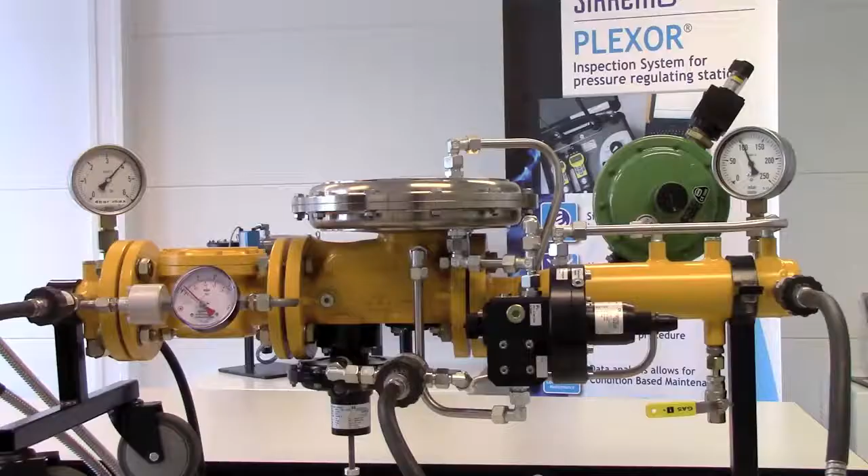Hello, my name is Jan Sietsma and I'm here together with my colleagues Reinier Marcus and Henk Pieters, and today we're going to show you a functional inspection of a gas control line with our PLEXOR inspection system for gas pressure regulator stations.

In order to demonstrate to you the PLEXOR system, we have a functional model of a gas control line where we use compressed air to create an inlet pressure of 4 bars with following components: a filter with a differential pressure gauge, a pressure regulator with integrated slam shut device, an outlet section with 100 millibars with a safety relief valve. Here we see the PLEXOR test device.

The system is IEC-Ex approved and can therefore be operated inside the gas control station. The main components are a digital manometer for the inlet pressure, one for the outlet pressure. Out here we have a Bluetooth device for wireless connection with a tablet, laptop or PDA. Here we see the function switch, which allows us to operate and test the various devices.

This is the test lever to give a standardized pressure rise or pressure fall of 1.5% per second. And here we have the system connections. First one is for the inlet pressure, the outlet pressure, the sensing line of the slam shut device, and finally the ventilation. The PLEXOR test device uses the inlet pressure to test the components of the gas control line. Various gas control line configurations can be functionally tested independent of the brand of the component.

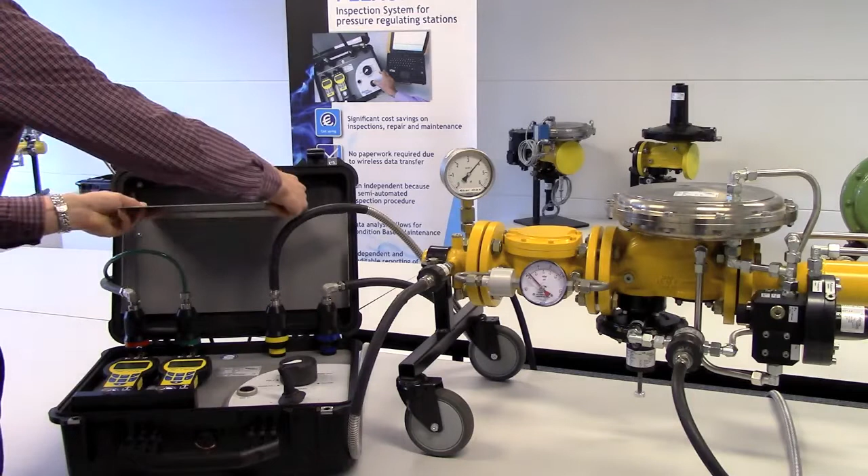Part of the PLEXOR inspection system is the connection software. This connection software consists of several modules. The manager module to manage the data of the pressure regulating stations, gas control lines and boundaries and inspection procedures. The inspector software to perform the visual and functional inspections, and the diagnostics module to analyze the results of the functional inspections.

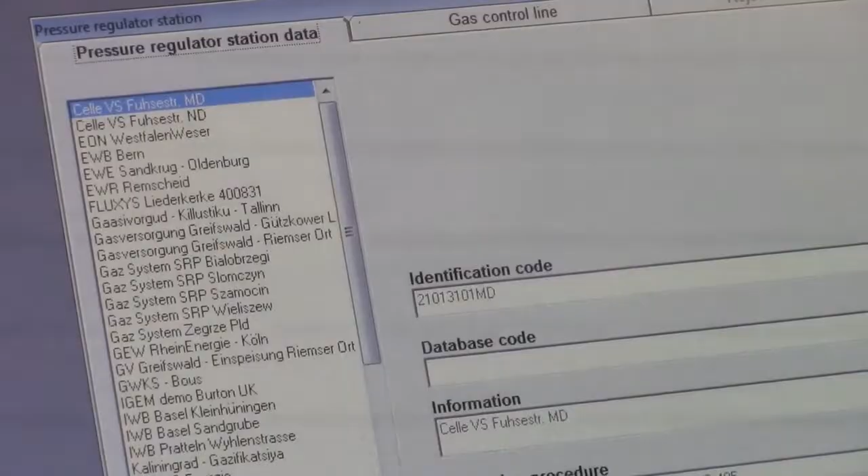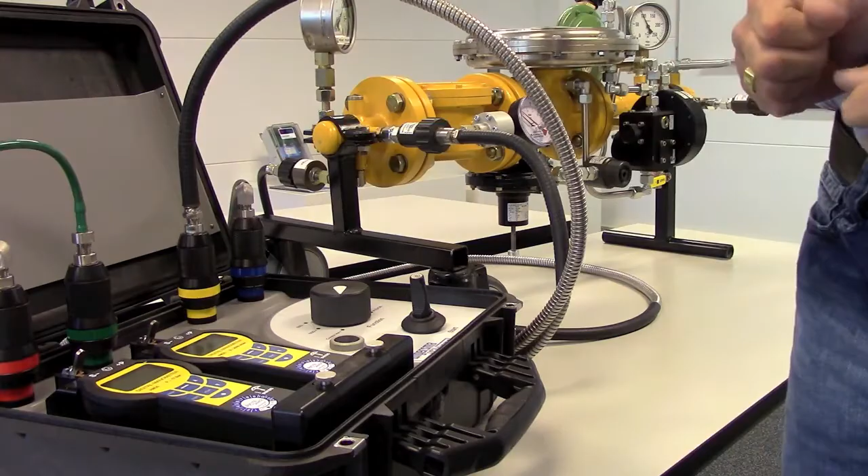The PLEXOR test device will be connected to the gas control line by means of color-coded, double-secured hose connectors. Against the clock, push, with the clock, and by the unique dimensions you cannot mix up this connection. Take away the protection cap and connect the hose to the system coupling.

All hoses are connected: inlet pressure, outlet pressure, slam shut device and ventilation to the gas control line. All couplings have their own unique dimension, so you are not able to mix up the connection from inlet to outlet. By using the Inspector PC software on the tablet, selecting the gas control line, make connection to the PLEXOR test device, the operator will be guided step by step through the functional procedure.

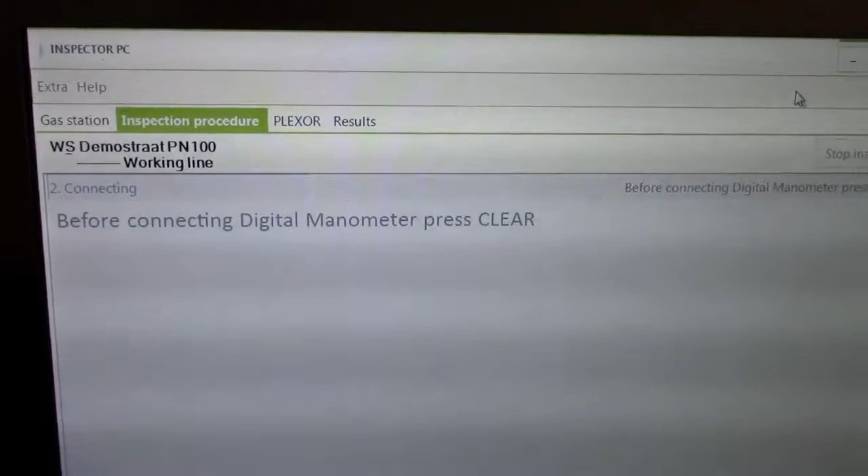Before connecting the digital manometers, we press clear 0 to adjust the manometers. Connect to inlet and test pressure and go for the next step. Put the switch into the position control line. And go for the next step.

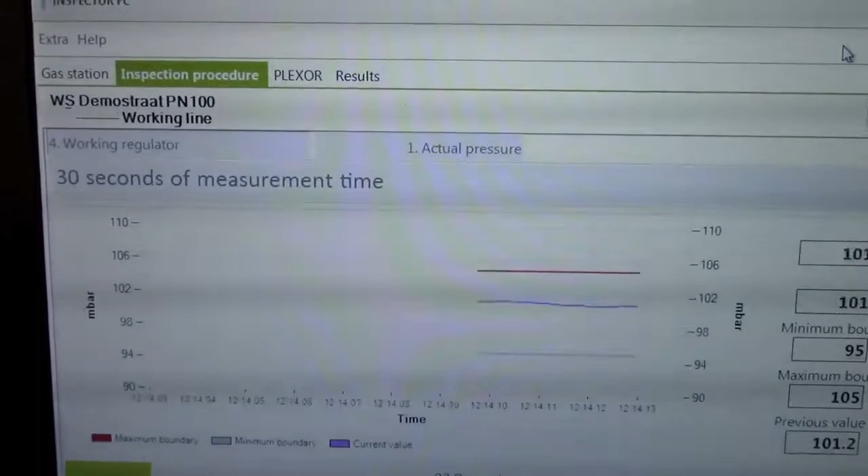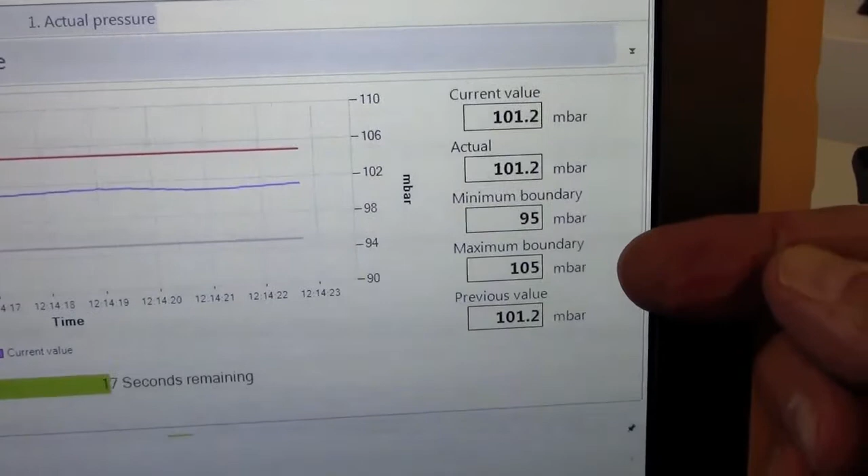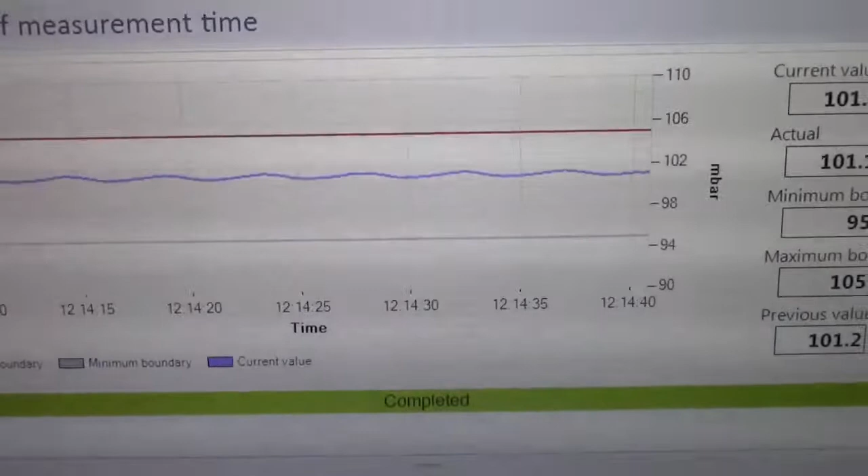Now, for 30 seconds, the outlet pressure will be measured, showing us the current value, the boundaries, accuracy range of the regulator, and the last previous value. That's the result of the last test. This measurement is 30 seconds and will log 10 measurements per second. After this beep, the display shows us the complete 30 seconds of this measurement. We are inside the boundaries, so we can continue with the next step.

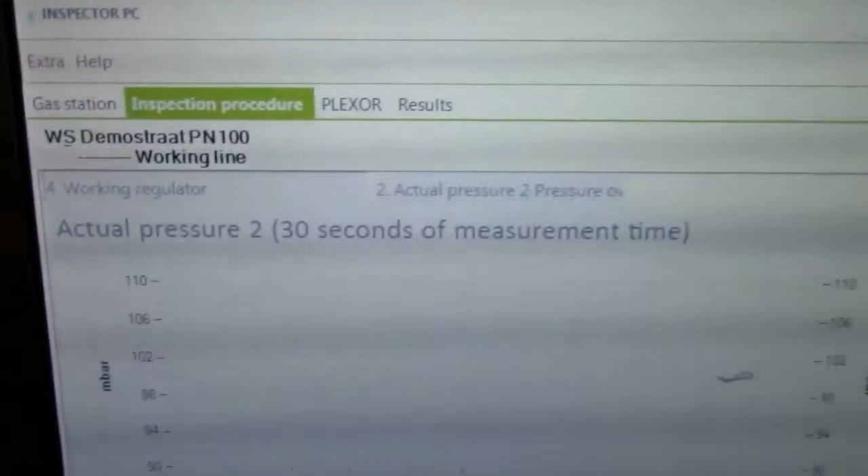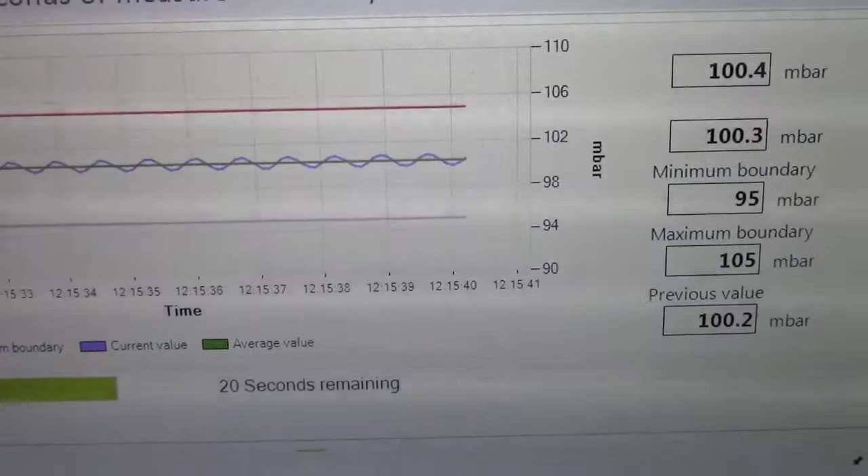We are now closing the outlet valve and go for the next step. We are now opening the ventilation valve in the gas control line to have a stable situation. Go for the next step. We are now measuring the actual pressure simulated over the ventilation valve to check the set point of the regulator. The value is 100 millibar, accuracy range 95, 105, and the last value was 100.2 millibar.

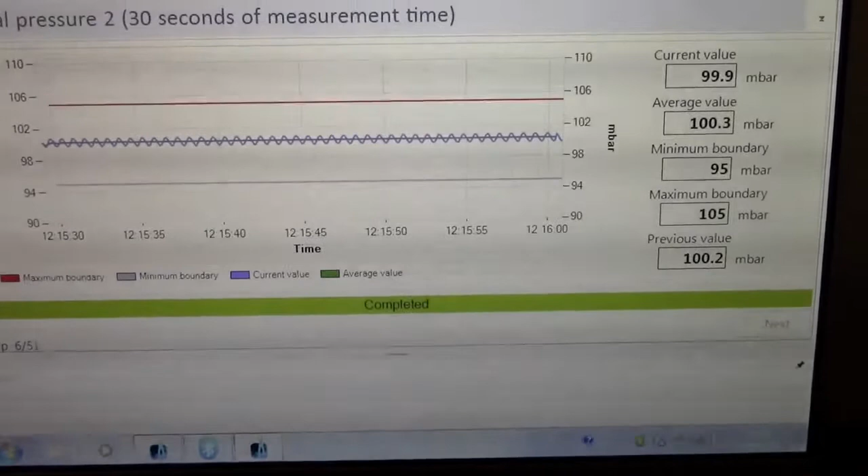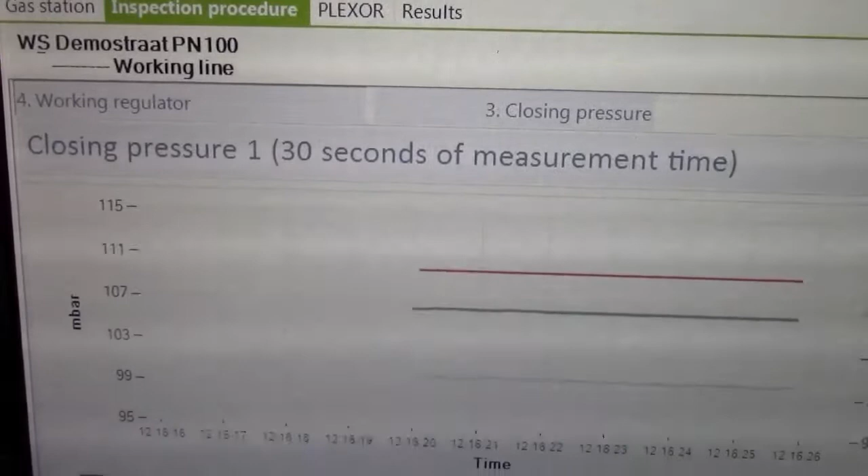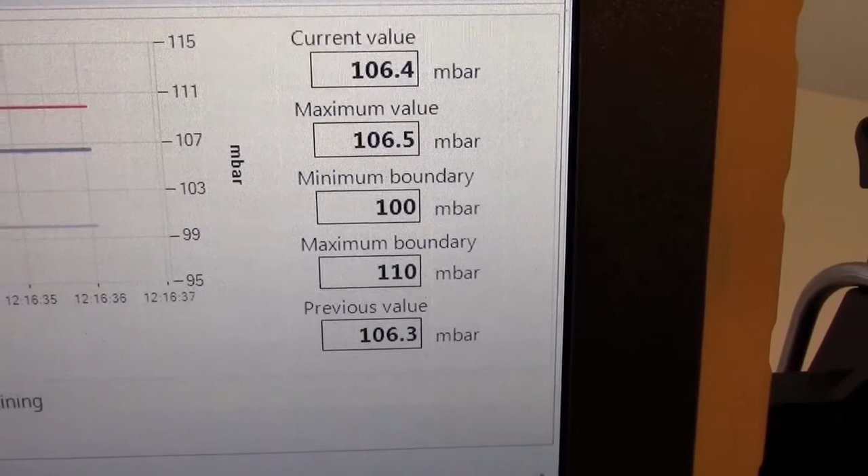This measurement is also done for 30 seconds. So it's within the rejection boundaries. We are able to continue the measurement by closing the ventilation valve. Next step. Now the lock-up pressure measurement will be starting for 30 seconds. You will see the current value 106.4, the boundaries 100, maximum 110, and our previous value from the last test was 106.3. So we are inside the limits of the regulator lock-up pressure.

Next step, we are now opening the ventilation valve again and directly slowly closing it again to simulate some pressure. And now for the next step, we measure the second lock-up pressure also for 30 seconds.

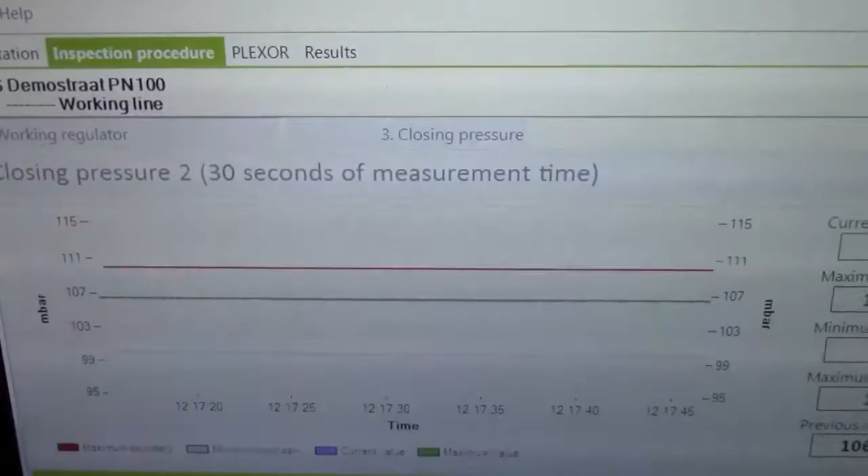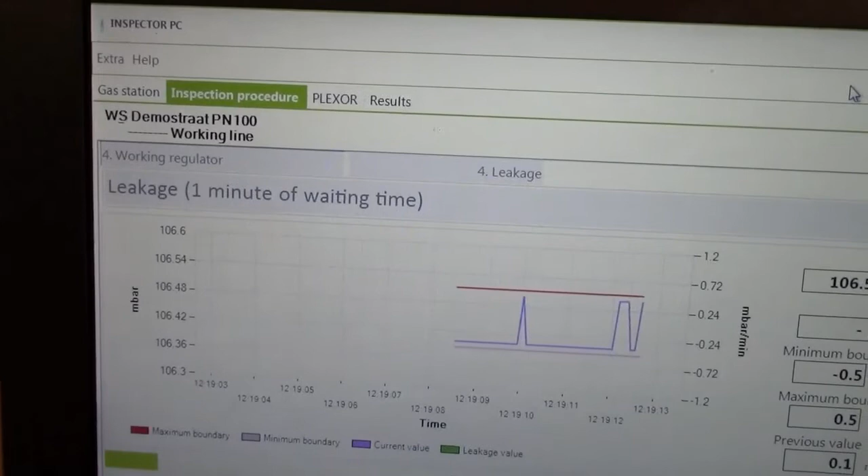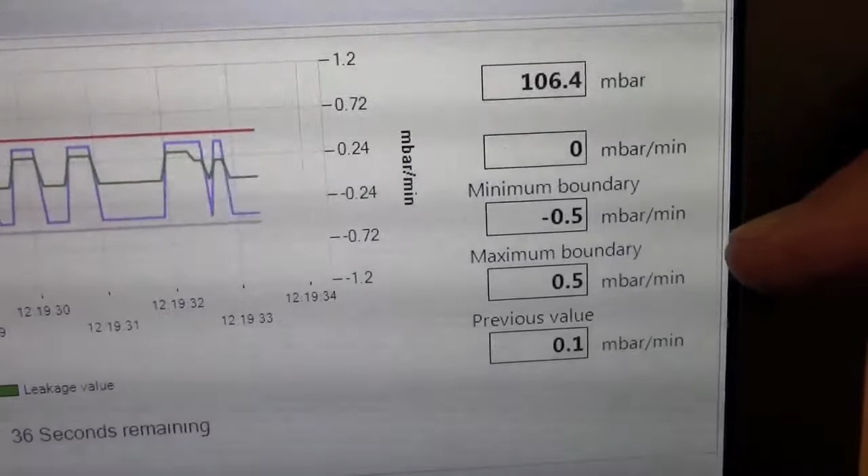The second lock-up pressure measurement is done to verify the lock-up pressure set point of the regulator. The next step, automatically starting the leakage for 1 minute by lock-up pressure. We are now measuring if the valve of the regulator is closed, and we see a leakage value of 0 millibar per minute, and it's within the limits of plus minus 0.5, the accuracy of the PLEXOR test device.

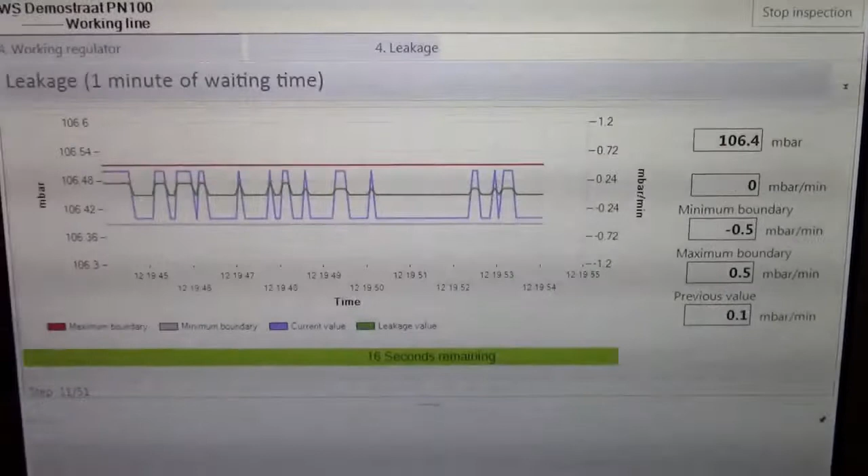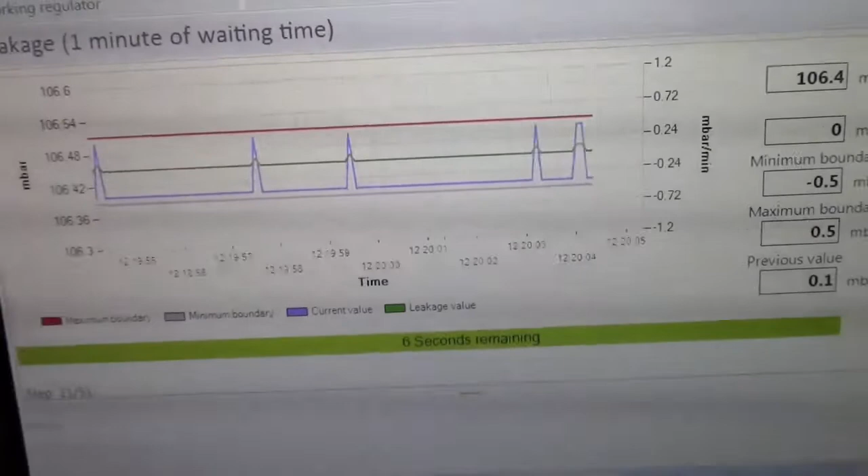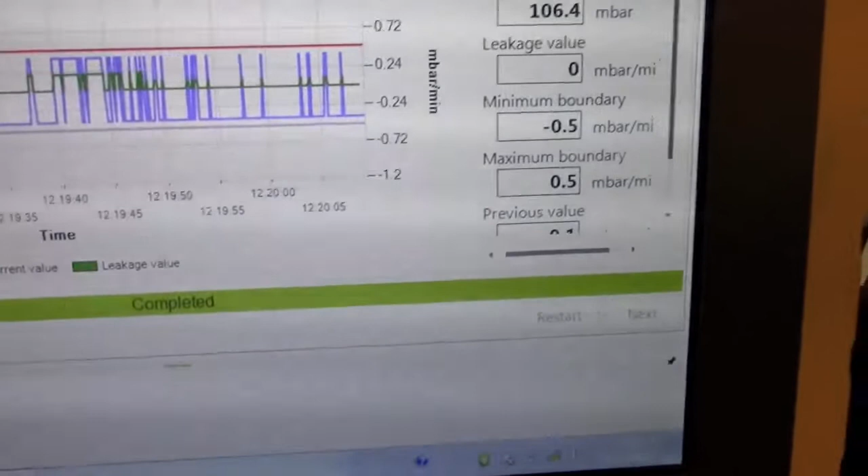Our last measurement was 0.1 millibar. So you're able to check directly on location the previous value, today's value, and our limits. The results are inside the boundaries, so we don't have to restart the measurement again. When there are regulators with a slowly closing valve, it can happen that it moves very slowly to closing lock-up pressure. Then we can restart the measurement again. We go for next step.

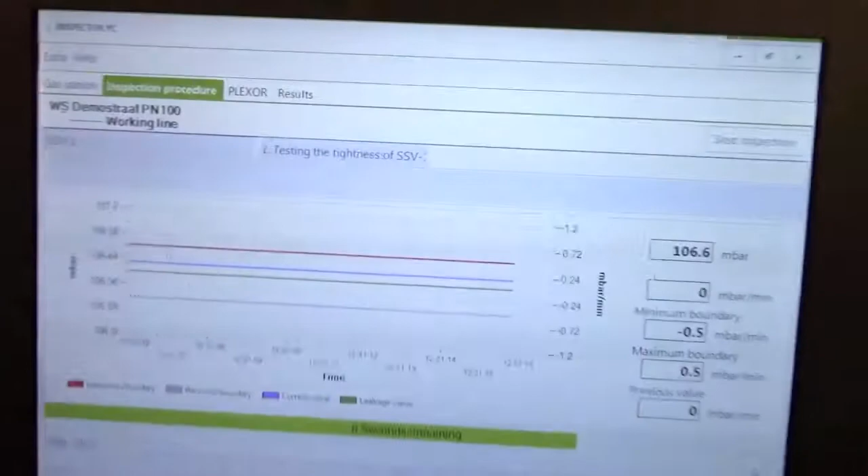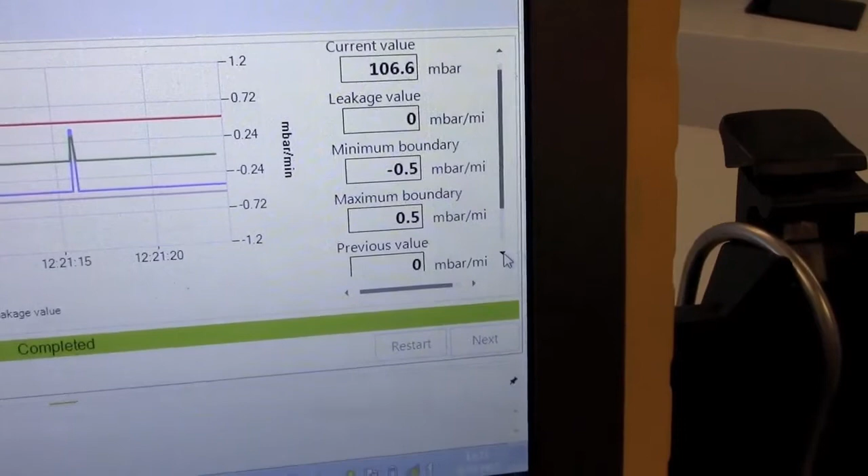Now we will start the joystick in position 1, and we are now measuring the inside part of the slam shut device, meaning membrane, O-ring, etc., to test the inside closing. There is no leakage at this moment. So this is completely okay. We can show also the last value. The last value was also 0. So the status is it's fully closed. Now we go for next step.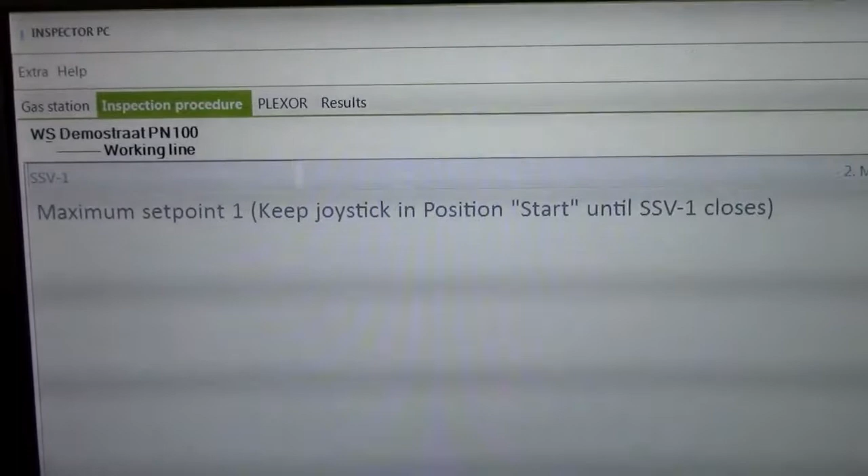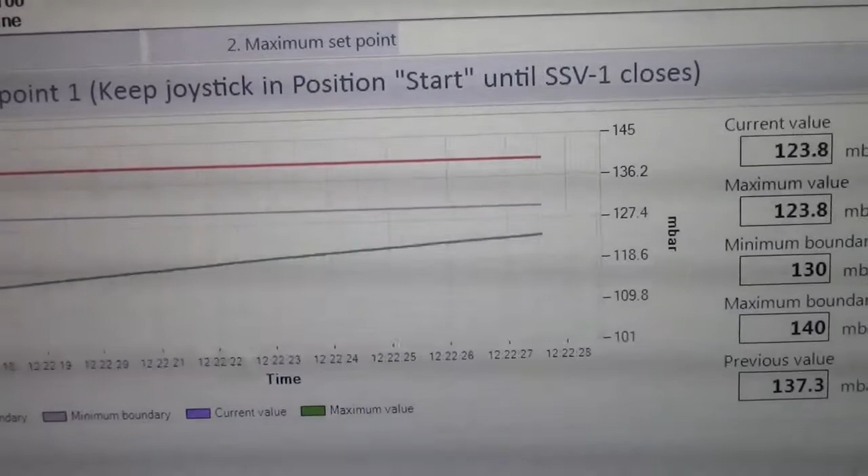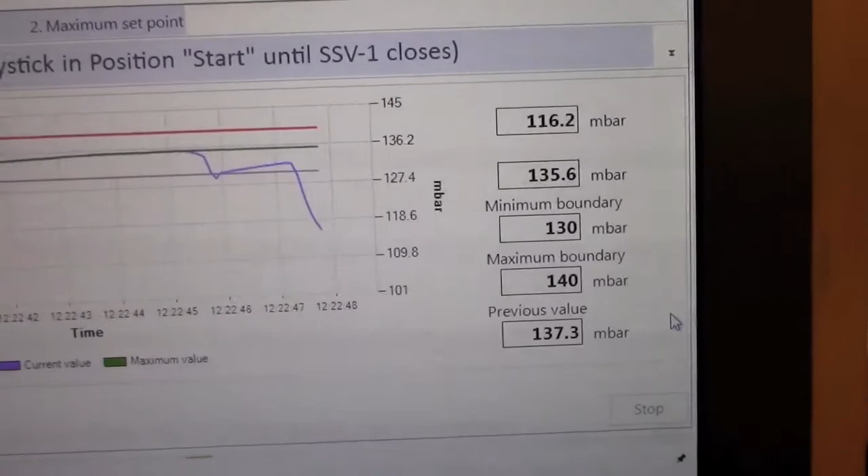Put the switch into the position slam shut device plus to measure the maximum set point of the slam shut. We keep the joystick in the start position and wait till the slam shut device closes. The pressure will automatically increase by 1.5% per second. You see it in the green line. The reaction boundaries are 130, 140, the accuracy range. And now we wait till the pressure meets the set point of the slam shut. The slam shut closes and we stop the measurement.

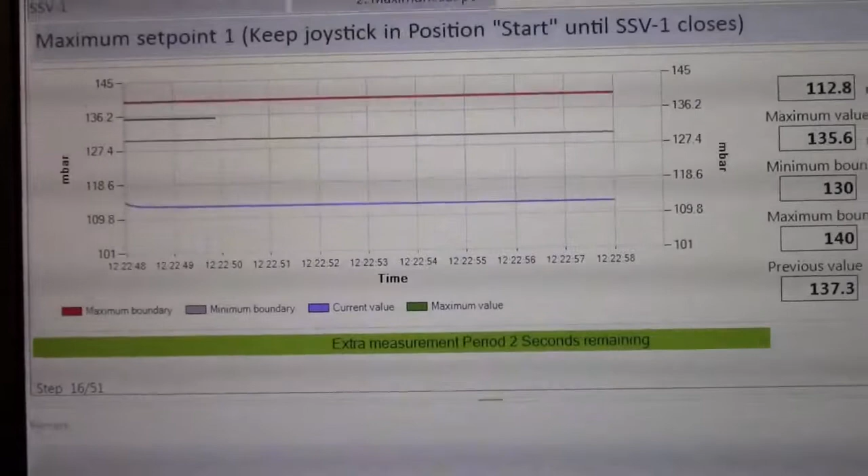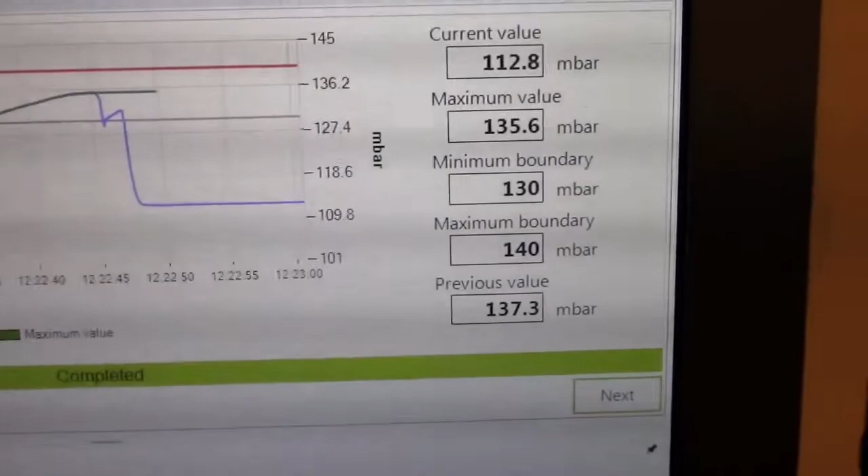We are now logging the data, and in a few seconds you will see the graph of the pressure increase and the closing of the pressure slam shut. The slam shut closes by 135.6. It's within the boundaries, and our last previous value was 137.3. First measurement is done to measure the sticking value, the second for the actual value, and the third can be done to verify the set point. In this configuration, the safety slam shut has also a minimum protection.

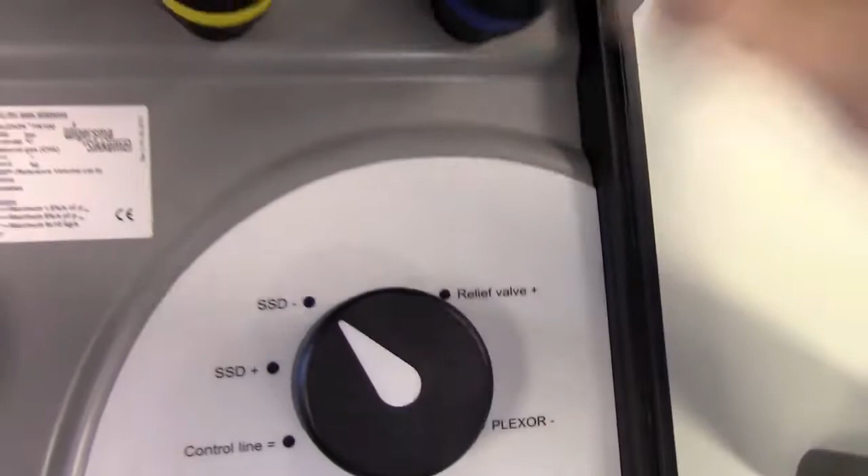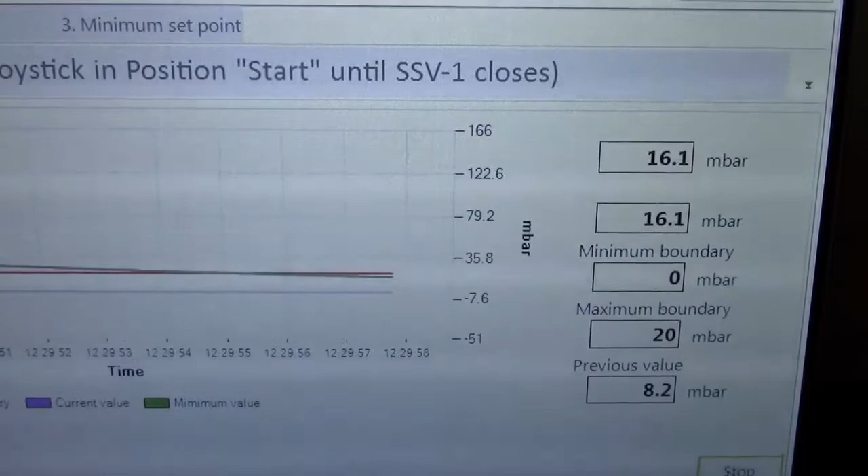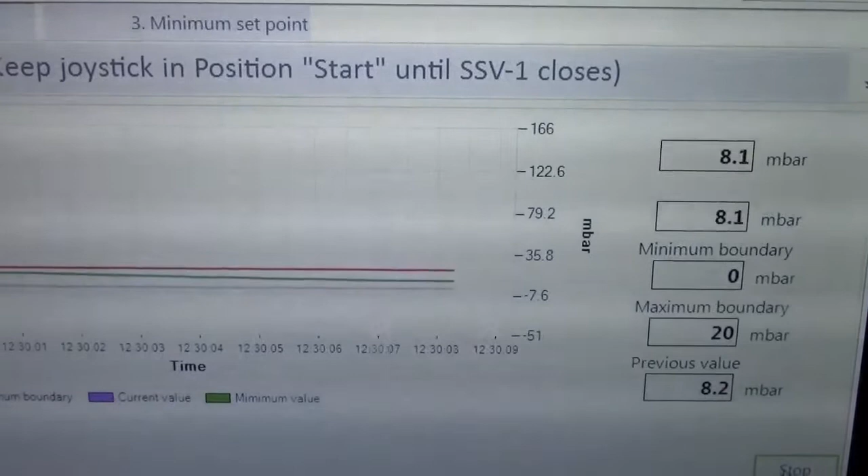So the next step will be put the switch into the position slam shut device minus and go for the next step. For the set point number 1, we keep the joystick in the position start till the slam shut closes. You see the pressure drop of the green line, and we wait till the slam shut closes. At the moment the slam shut closes, we loosen the lever, and now the data is logged and shows us in a few seconds the result of this measurement.

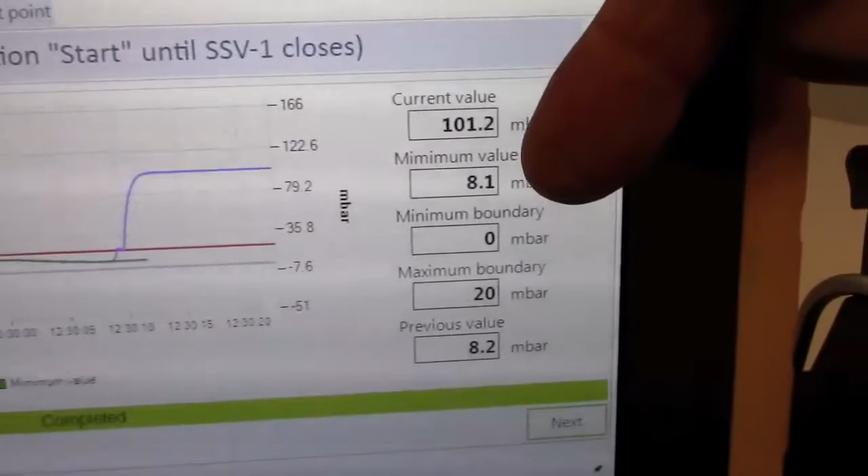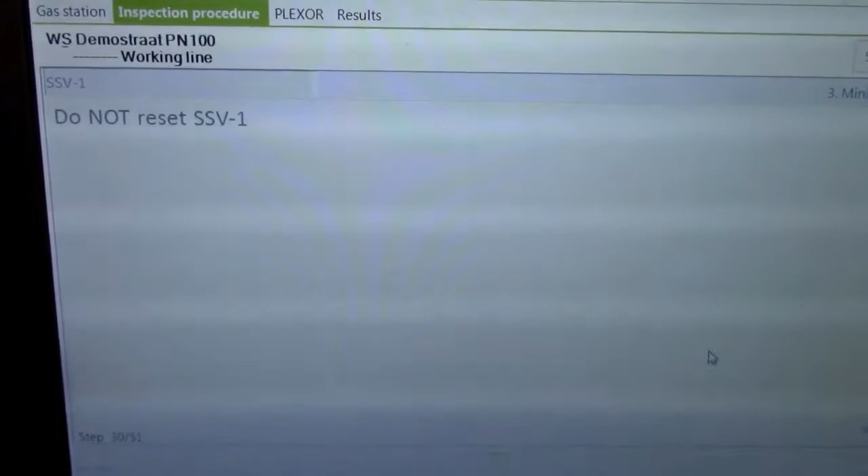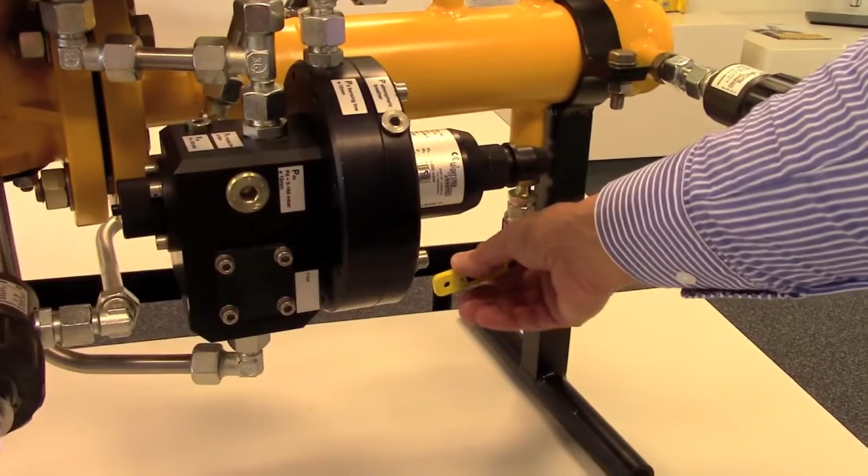The pressure drop value, actual value 8.1, it should be in the limits 0 to 20 millibar, and our last value was 8.2. So the results are okay. We go for the next step and reset the slam shut device for the second measurement. After the second test of the minimum protection, we do not reset the slam shut device and go for the next step. Now we reduce the outlet pressure to 10% under the network pressure. The network pressure is 100 millibar. Okay. And we go for the next step.

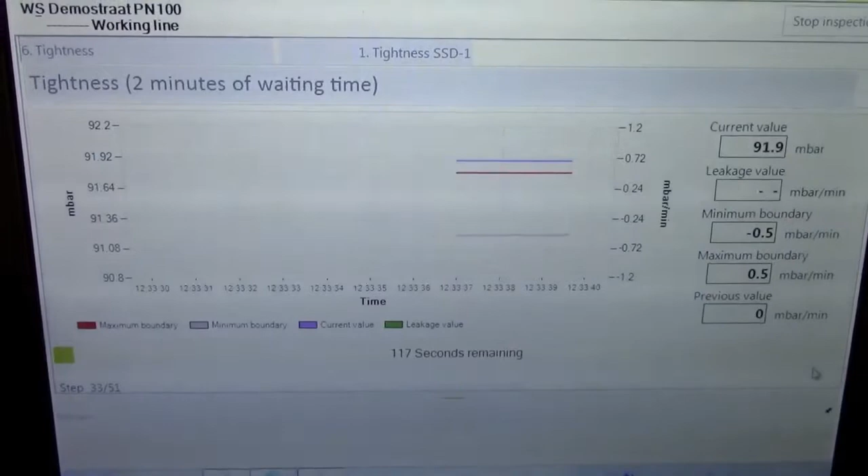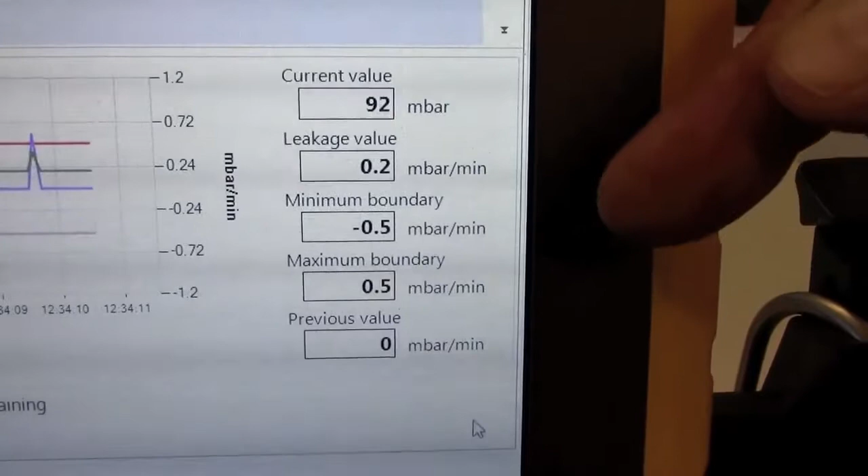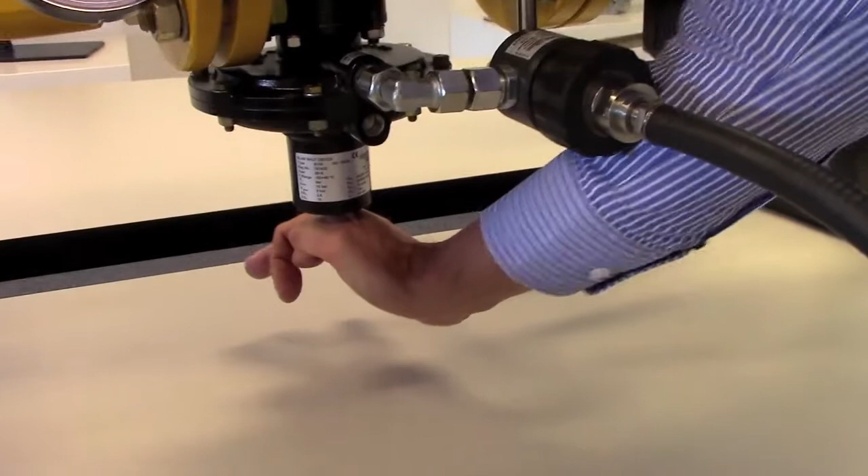And wait for 2 minutes to stabilize the outlet volume to be able to measure the closing of the slam shut. Now we automatically start for 2 minutes the tightness of the valve of the slam shut device. The slam shut device leakage value is 0.2 millibar per minute. It's inside the boundaries, so it's okay. The slam shut valve is fully closed. After the tightness test of the slam shut valve, we reset the slam shut. Okay. And go for the next step. Now we have tested regulator, slam shut, and now we are changing the hose from the outlet pressure to the safety relief valve.

The next step, close the valve in the pipe of the slam shut relief valve. After connecting the hose to the safety relief valve, the next step will be to close the valve from the relief valve to isolate the safety relief valve from the gas control line. We go for the next step and put the switch in the test position relief valve.

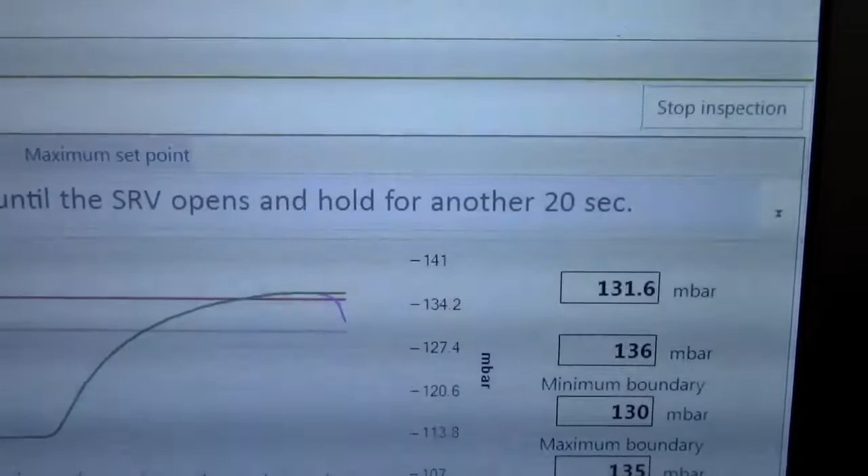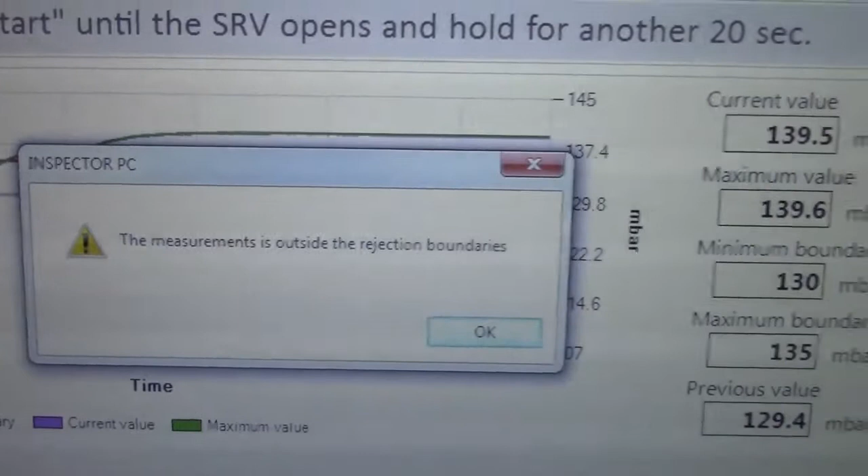Next step, keep the joystick in position start until the safety relief valve opens. Okay, we can now stop the measurement, and you see we are outside the boundaries. The current value, the set point, the opening value of the safety relief valve is 139.5 and should be within the limits of 130, 135. So there is a message that we are outside of the boundaries, and the operator can decide how to continue or to take action, direct action.

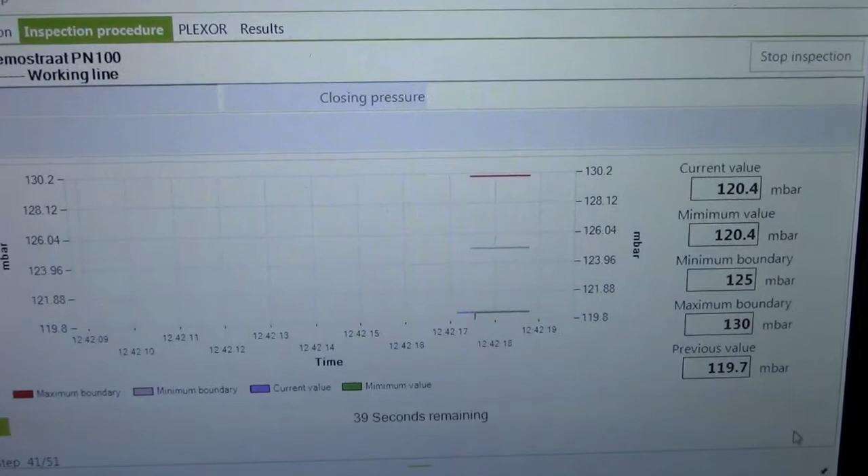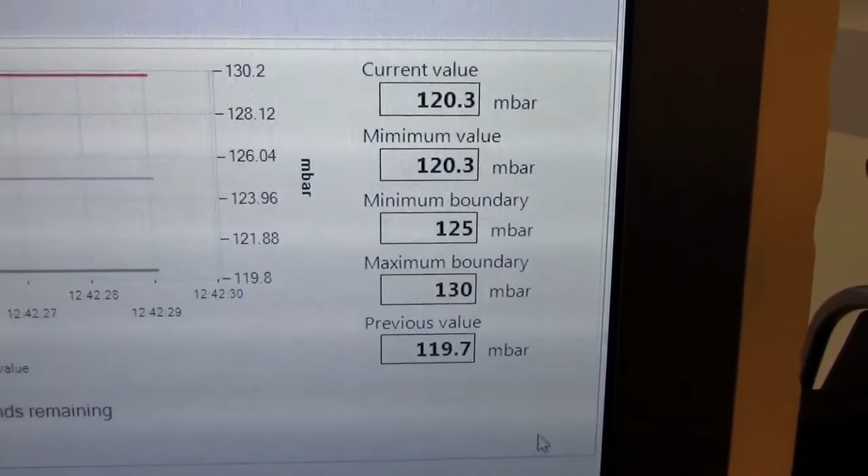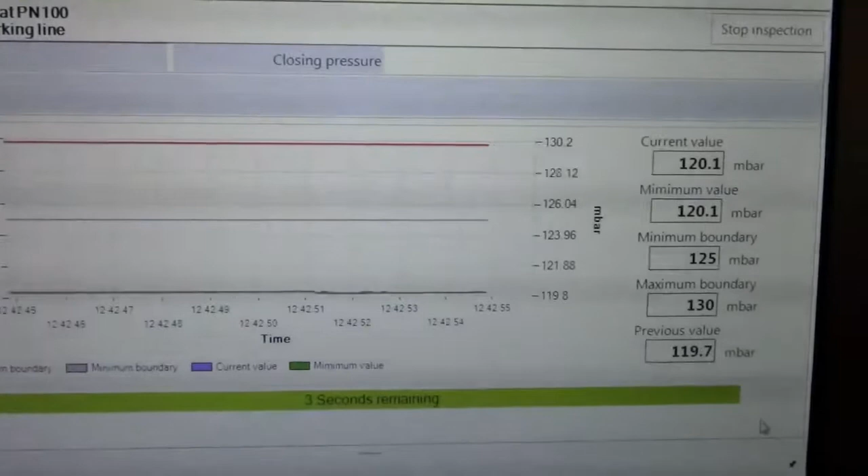We go for the next step. The next step will now measure the closing pressure of the safety relief valve. The closing pressure of the relief valve is 120.3 millibar. The boundaries, the minimum boundary, is 125. So it's outside the boundaries. And after a few seconds, we will see the results displayed on the computer. The measurement is outside the rejection boundaries, and the operator can decide how to continue or take action. We go for the next step.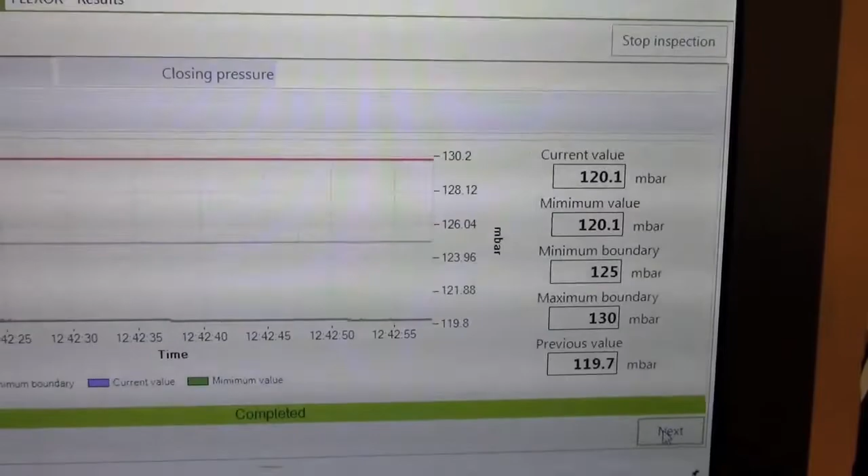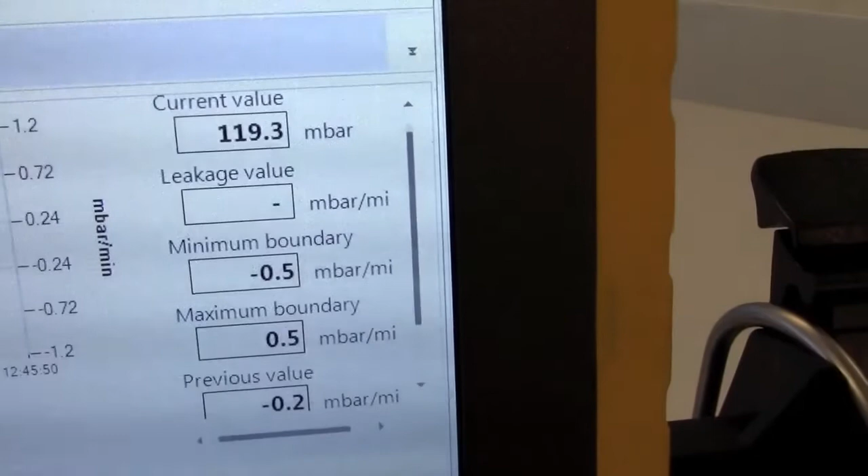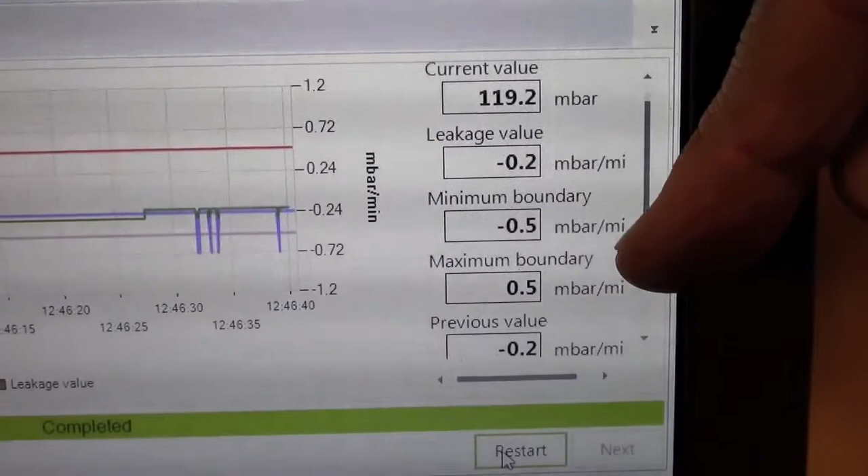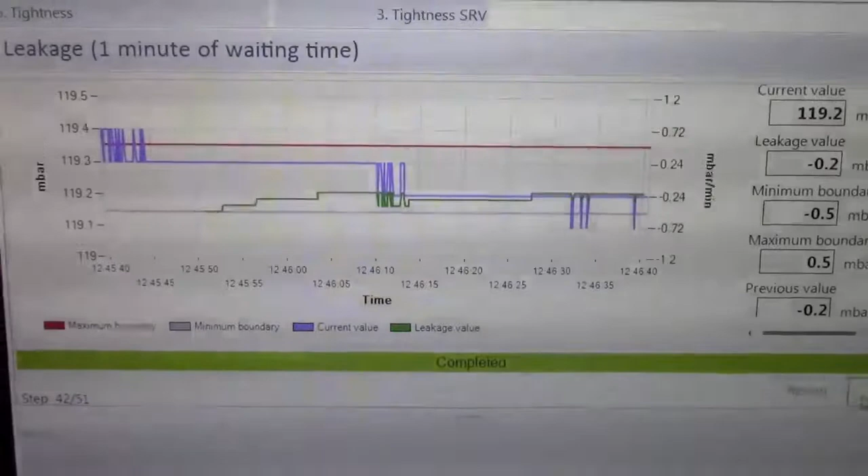Now automatically the tightness of the safety relief valve will be measured and indicated in a leakage value in millibar per minute. We see that the leakage value is minus 0.2. It's inside the limits, and when this minimum leakage value is minus, then it means it could be having an external leakage. And now you see it's okay, and we don't have to restart the measurement, so we can go for the next step.

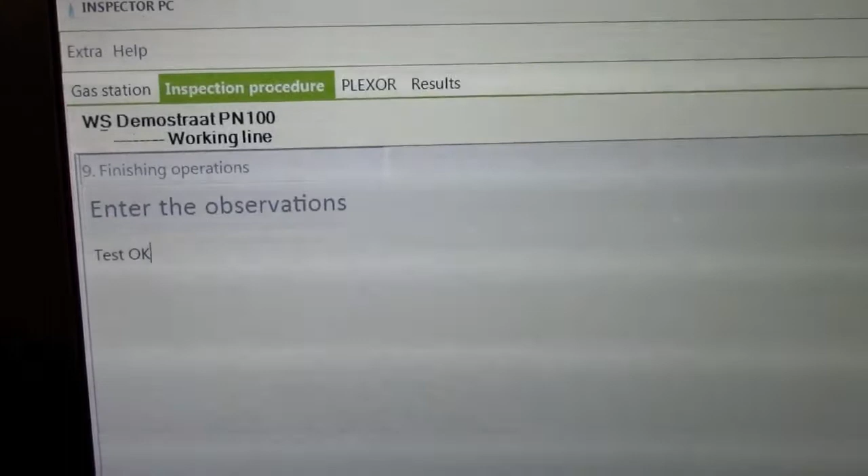After this test, we are able now to enter some observations, and in our opinion the test was okay. Test is okay. We release all hoses from the gas control line. Inlet pressure, outlet pressure, safety relief valve. And we go for the next step. Put the switch into the position PLEXOR minus. Keep the joystick in position start.

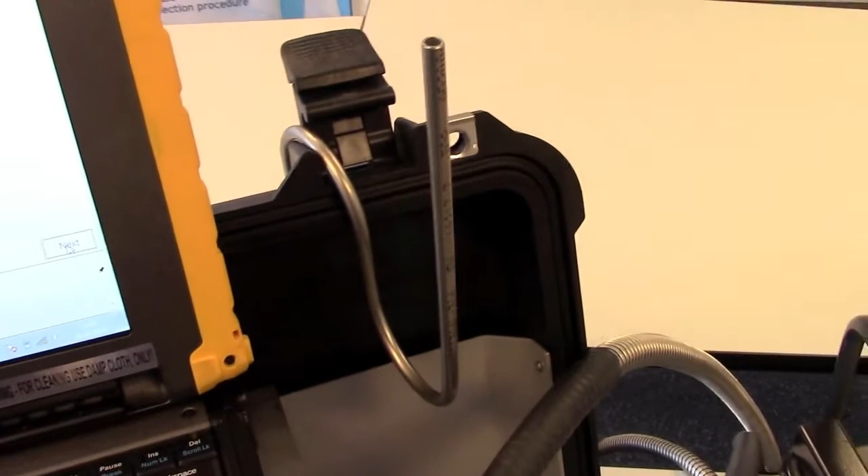Now we are ventilating all pressures inside the PLEXOR test unit and the hoses to be able to make a new measurement on another gas control line. Both manometers are showing us that there is no pressure anymore in the PLEXOR test device and the hoses. So now we can go to the next step. We put the gas control line back in the working position. Opening the outlet valve. And go for the next step.

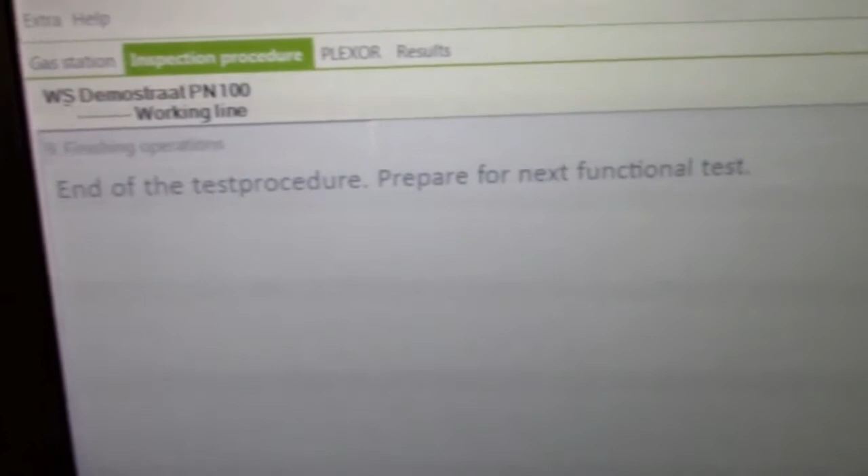Is the gas control line in the original working position again? Yes. Next step. Is the control center informed that we have finalized the test? Go for the next step. And now we can enter the name of the operator and go for the next step. The operator's name will automatically be stored in the protocol. Next step. We are now at the end of the test procedure, and we can prepare for our next functional test on another gas control line.

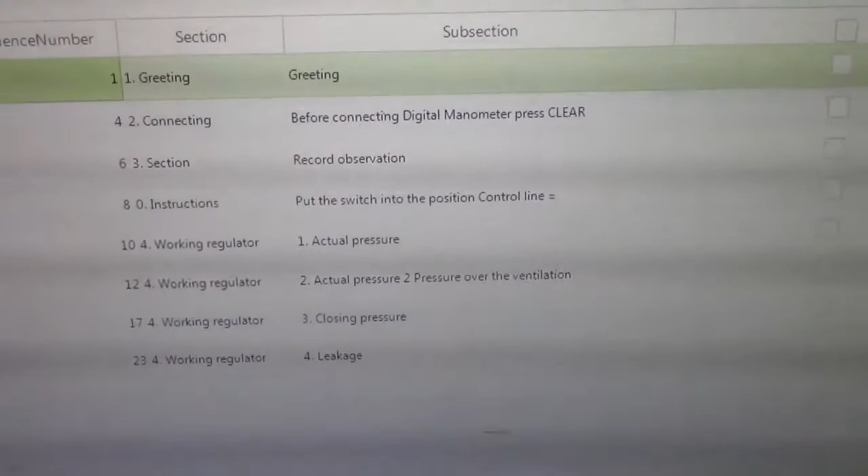And at this moment we are able to restart the program by testing those measurements which were outside the limits. When we now start the re-inspection, those measurements can be done again. During the functional test with the PLEXOR test device, two datasets are generated. One dataset contains the results that can be presented in a protocol, and it contains all the measured values, as you can see here.

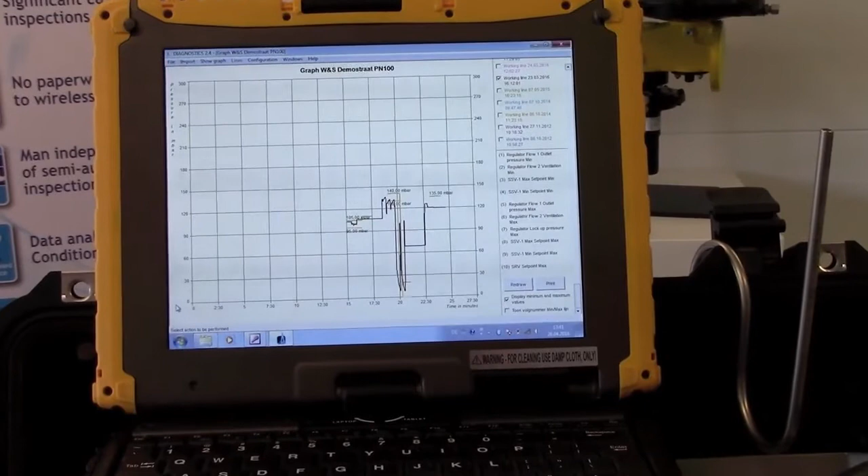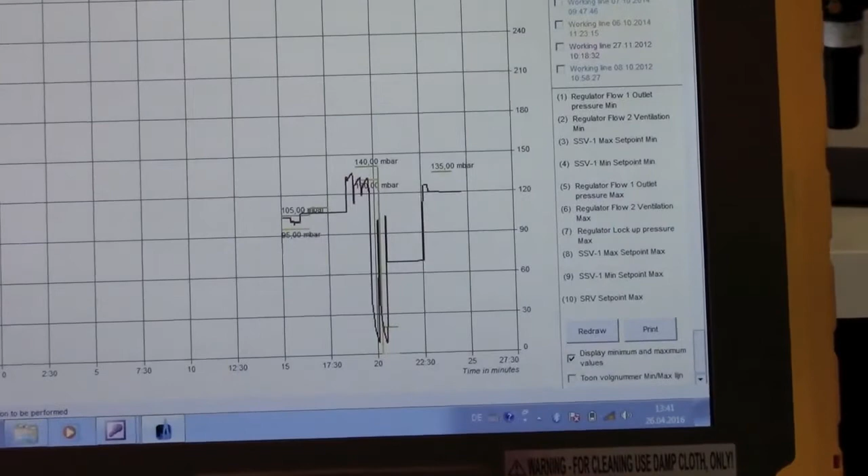The second dataset contains all the measurements of the complete functional test. By this dataset, I'm able to present the complete functional test in one graph, as you can see here. I can present up to 10 measurements in one graph, so I'm able to see if there are any trends visible on components, how they perform. The graph also shows the boundaries, so I can see if the measurements were inside my boundaries, yes or no. If I see trends, I can decide to change my strategy, to stretch my maintenance and inspection intervals. And by doing this, I can save a lot on labor and spare parts. Concluding that by using this system, a lot of money can be saved.